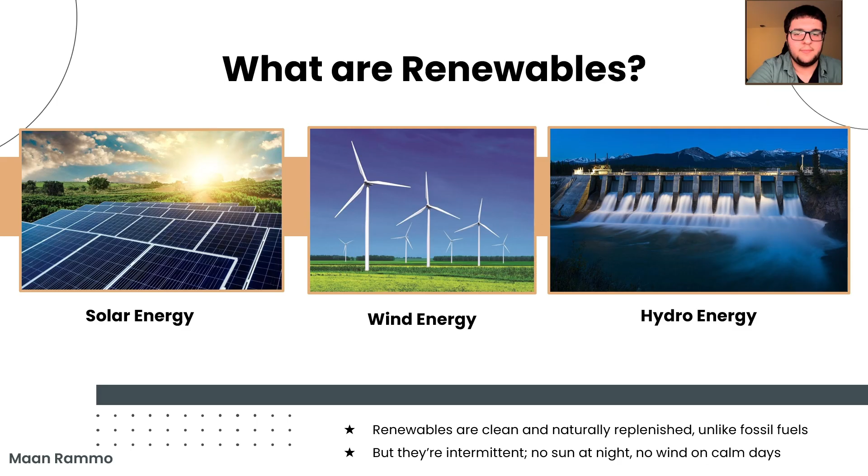The power grid has to stay balanced. If there's too little energy, we get blackouts. If there's too much and we can't store it, then that extra energy is wasted. In Germany, during an event called Dunkelflaute, both sun and wind generation dropped heavily for 2 days.

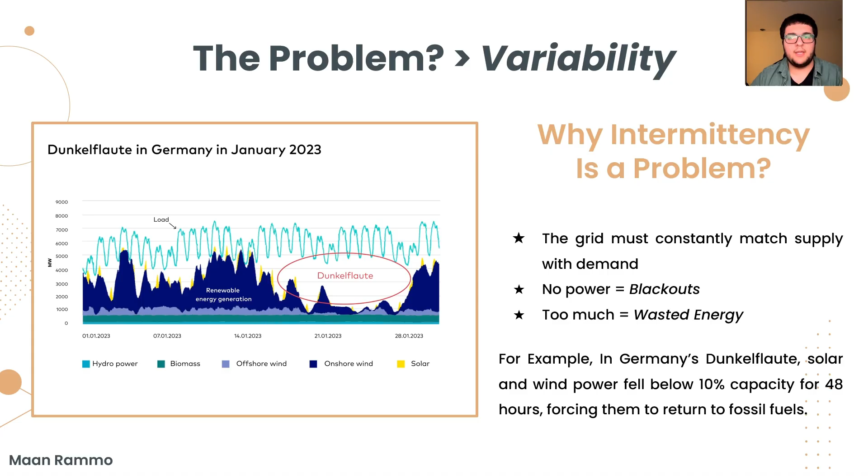As you can see in the graph to the left, renewable output fell to less than 10% of capacity, forcing the country to bring back fossil fuel plants just to keep the grid running. To prevent this, we need strong storage systems and better ways to handle long gaps in renewable energy, which leads us into our problem statement.

And today I'm going to talk about the problem statement: storage limits renewable growth. Hi, so for this slide, I'm going to show why solar and wind are not 24/7. On the left, you can see California's duck curves as solar grows. The midday dip gets deeper, and in the evening, the ramp gets steeper. Without storage, grid operators dump solar power at noon and then scramble after sunset to meet demand.

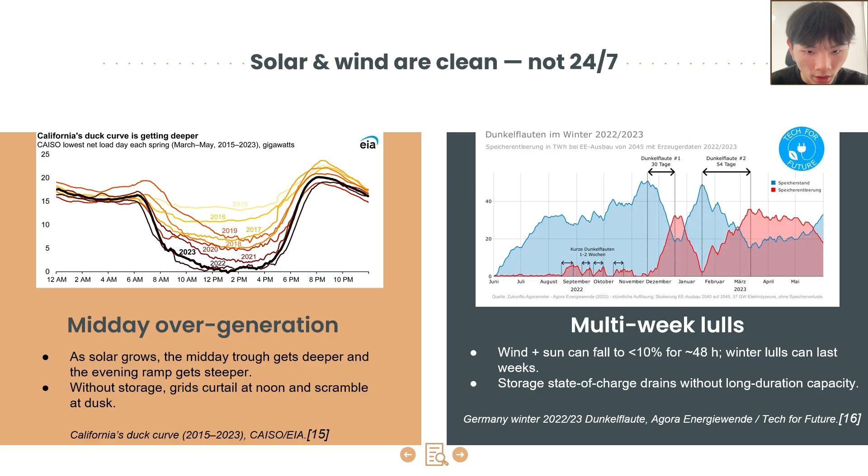On the right, we can see a German winter Dunkelflaute, literally dark doldrums. Wind and sun can drop to under 10% for about 48 hours, and in winter, those lulls can last weeks during the stretches. The state of charge just drains unless we have long duration storage.

I'm going to talk about why storage is the bottleneck. On the left, the IEA said the grid needs 1,500 GW of storage by 2030, about 1,200 GW in batteries, or we face curtailment or slow connection.

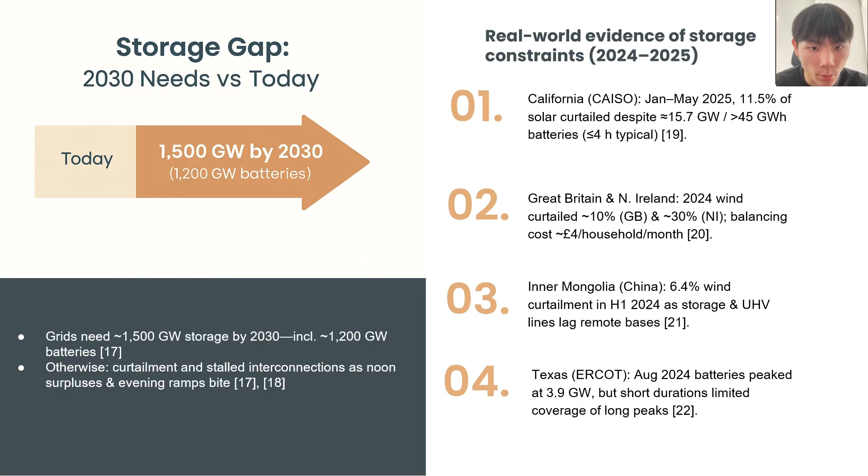Here are some examples. First, California dumped 11.5 of solar, Great Britain and Northern Ireland curtailed 10 to 30% of wind, and Inner Mongolia 6.4%. And Texas has 3.9 GW of battery output but runs out of duration.

And now, on to the main content. So what is a flywheel? A flywheel is an energy storage system which stores rotational kinetic energy by spinning a cylinder about an axis. The formula that represents this stored energy is 1/2 of the moment of inertia of the cylinder multiplied by the square of the angular velocity, K = ½Iω². During energy surplus, the flywheel is spun up by a motor, and during energy deficits, the motor acts as a generator, feeding power back into the system.

Here is a diagram showing common components found in most flywheels, these being a vacuum enclosure, magnetic bearings, a cylindrical rotor, a hub, a shaft, and a motor/generator.

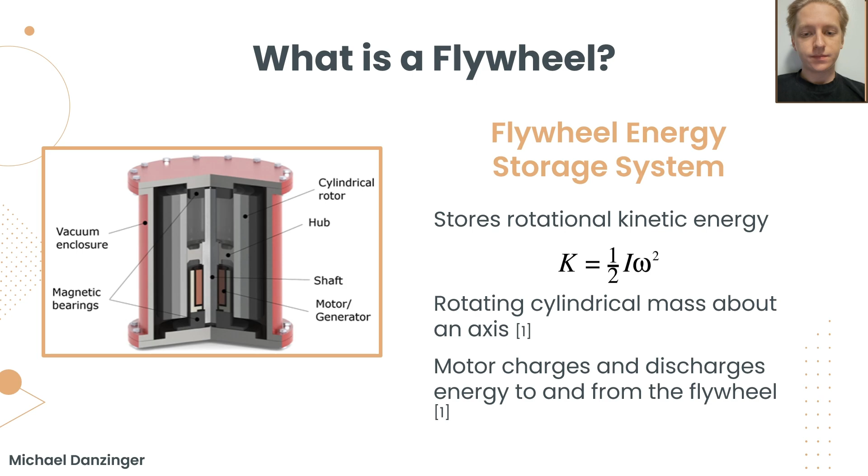Flywheel energy storage offers several advantages. First, longevity. Systems can operate for around 20 years before needing to be replaced, achieving more than 150,000 full charge and discharge cycles. Second, power density. Transportation trials have roughly shown a 2.7 kilowatt per liter power density, which is significantly higher than lithium-ion battery storage.

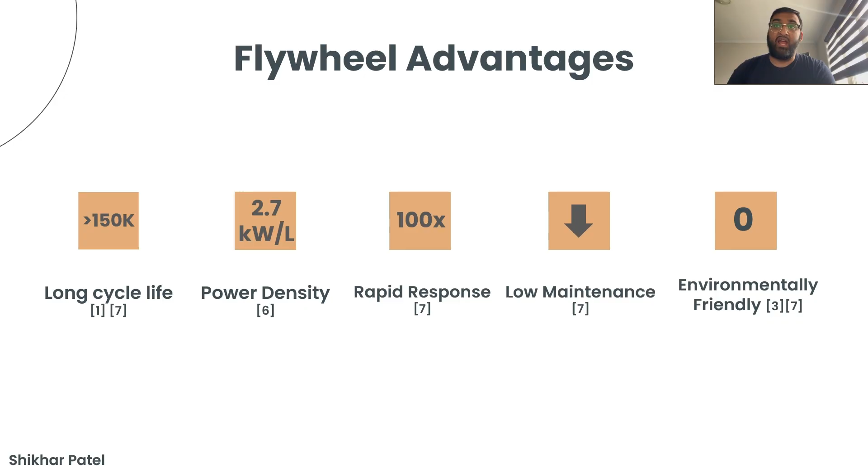Third, responsiveness. Flywheels follow dispatch signals about 100 times faster than traditional energy generation sources, making them excellent for grid stability and services. They also have low operating costs and are very easy to maintain due to their relatively simple makeup and upkeep. Finally, they are environmentally friendly and can be made from renewable resources.

However, there are some noteworthy drawbacks. The initial capital requirement is high. A US utility scale power plant of about 20 megawatts with composite motor rotor systems costs upwards of $50 million to manufacture. This was about double the cost of a battery power plant.

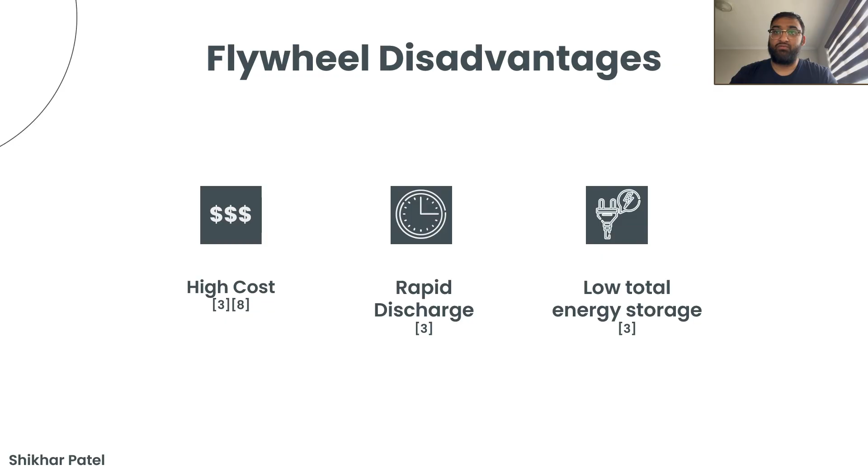Flywheels also discharge rapidly. Energy leaks away faster than many other traditional forms of energy storage. They are not ideal for holding energy over long periods of time. Lastly, while they deliver high power, the total energy stored within the system is comparatively low versus other forms of energy storage. Flywheels are a great solution to the grand challenge due to many factors.

They are sustainable and store energy in an easily accessible manner. They can be used to compensate for dips in energy production, as the energy they store is immediately accessible. This makes them ideal for residential and commercial applications where consistent and stable energy supply is critical. The inconsistencies come from the intermittent nature of energy sources such as wind and solar.

Aside from electrical grids, flywheels have other applications. Flywheels can be used to power vehicles such as buses and other scheduled transport vehicles. This can be used to offset the emissions created by vehicles during operation and reduce our reliance on chemical batteries.

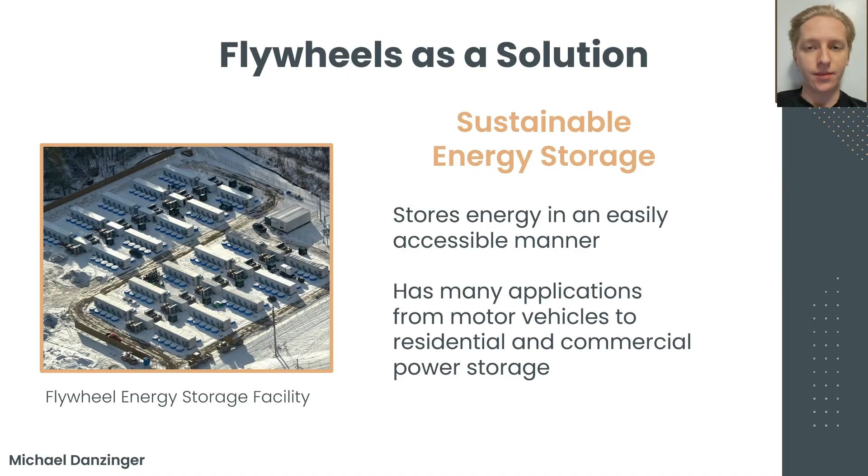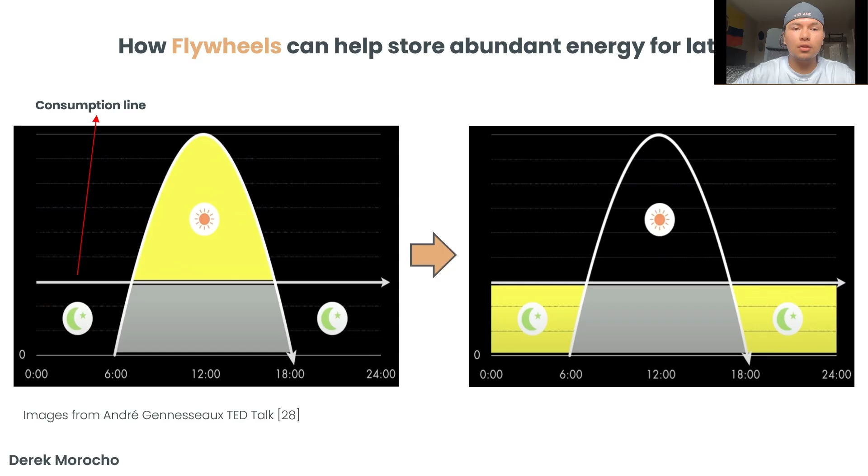Hi, I'm Derek, and I will be discussing how flywheels can help store abundant energy for later. The way a flywheel energy storage system works is very simple. We start with an abundance of energy from renewables, and this energy is used by the motor to spin the flywheel, storing kinetic energy. When the energy from renewables doesn't meet the grid demand, discharge happens, where kinetic energy stored in the flywheel rotates the motor to generate electricity like an alternator, and is then supplied to the grid.

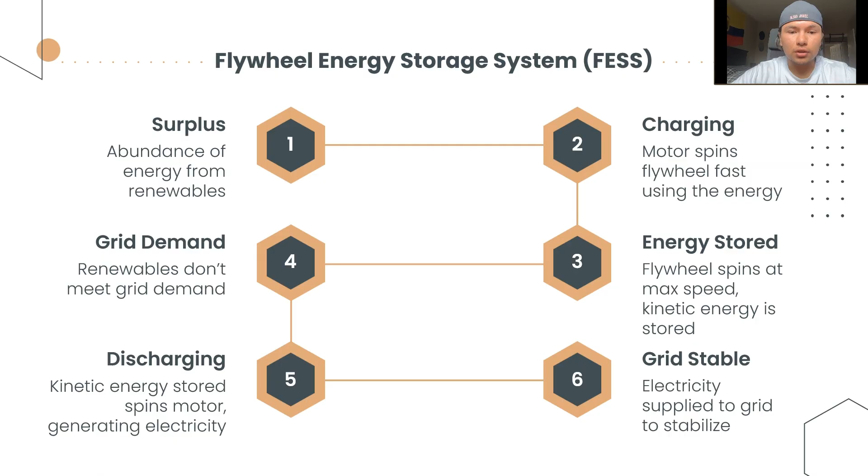The flywheel system can store energy for hours, which is good for tackling the intermittency problem of renewable energy. However, because of its low energy storage capacity and rapid discharge, it's not suitable for long-term storage. Think of it like storing food in the fridge. Good for short-term storage, but food can eventually go bad.

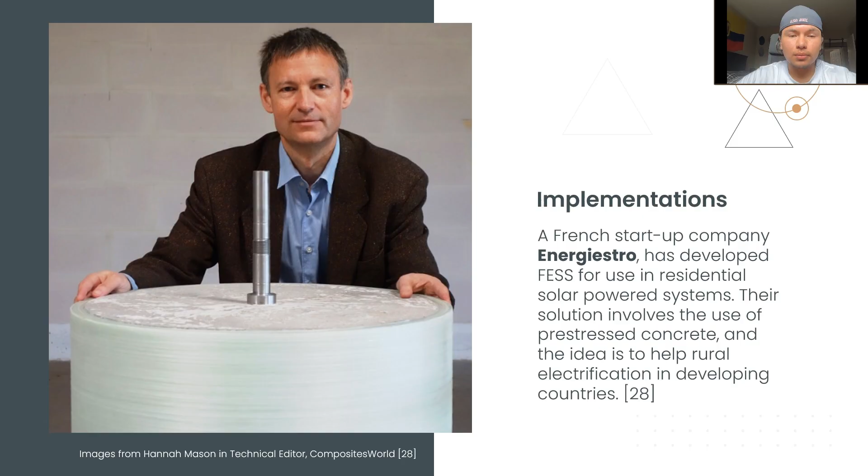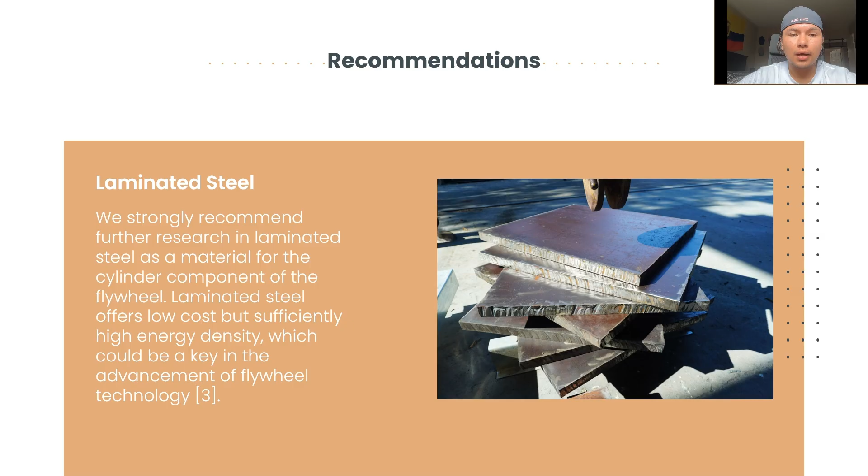Energiestro, a French startup company, has implemented this technology along with solar-powered systems to combat the intermittency problem in developing countries. To know the true potential of flywheels, more research and funding is needed. We recommend further research in laminated steel because of its low cost and high energy density. We think this could be a key in the further development of flywheel technology.

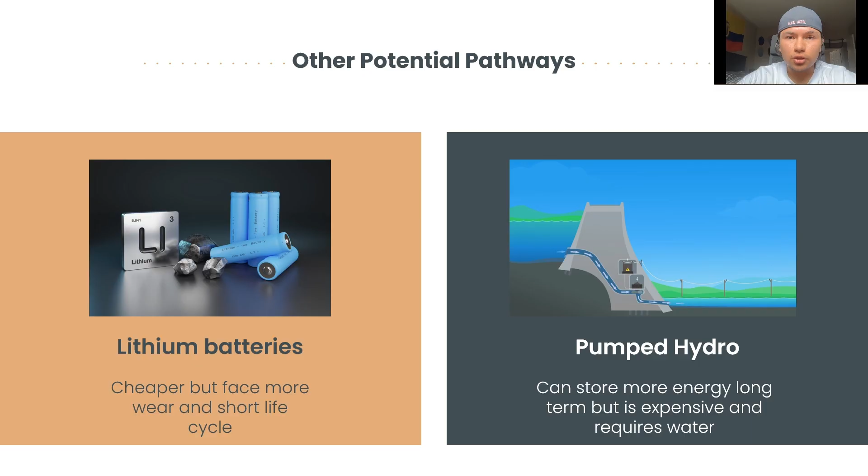Other popular potential pathways include lithium batteries, which are cheaper but face more wear and short life cycles, as well as pumped hydro, which can store more energy for longer but costs more and requires water.

To conclude, renewable energy is intermittent. A flywheel is a mass that spins to store kinetic energy. Some of the attractive features of flywheels are that they are long-lasting, require low maintenance, are power dense, and are quick to respond. But their high startup cost, low energy capacity, and rapid discharge make them unattractive. Flywheels are great for storing excess renewable energy short-term, but not good for long-term storage.

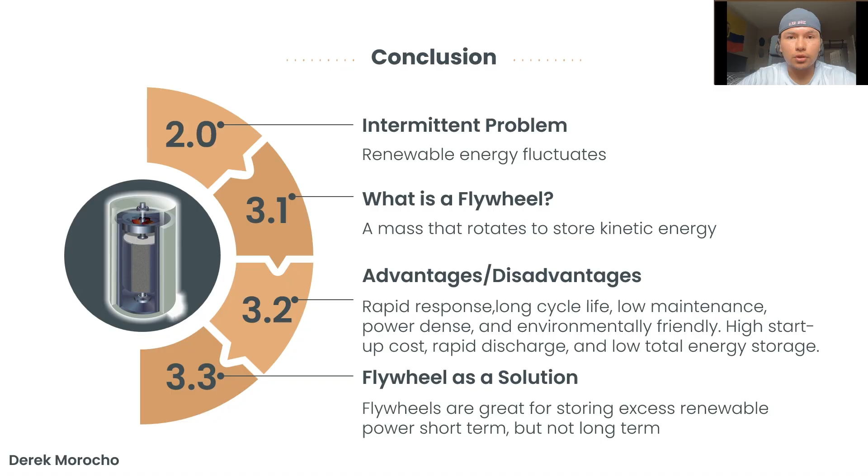So when we ask ourselves, what is the point of this? Well, it's to preserve the beautiful place we call home.